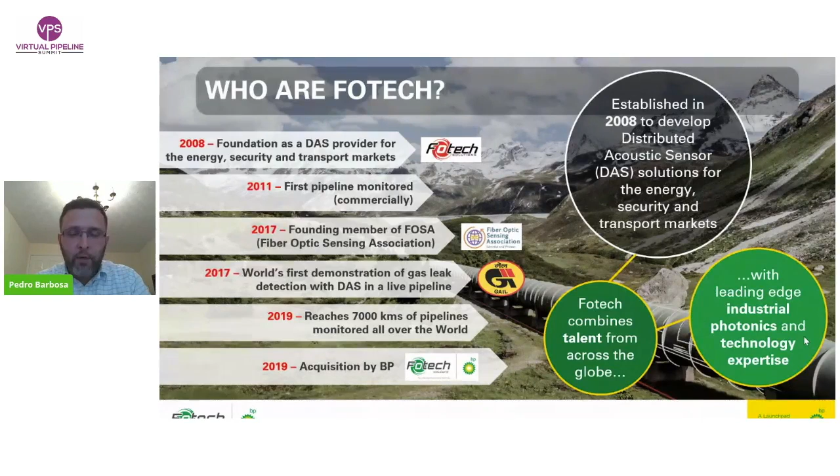So first of all, just a quick word about Fotech. Fotech was founded in 2008. We've also been leading the market in terms of distributed acoustic sensing. Just recently, last year, we were acquired by BP, so we are a launchpad company by BP. We've been monitoring in multiple sectors. Specifically today, the talk is about pipelines, but we also work in smart cities, infrastructures, and security.

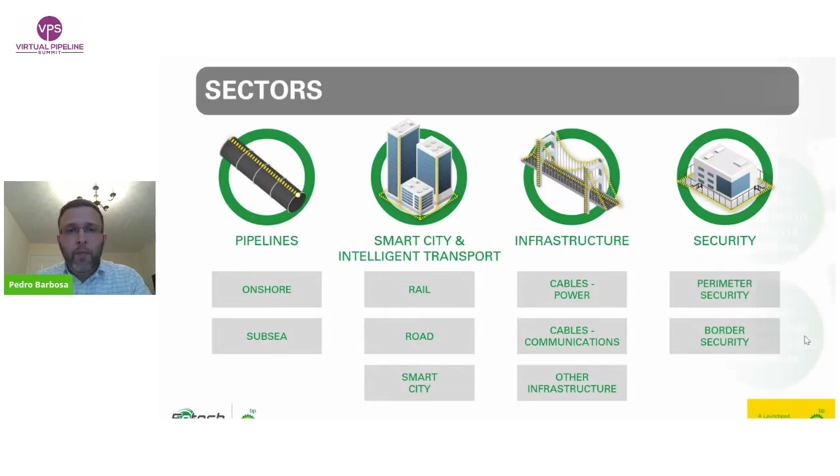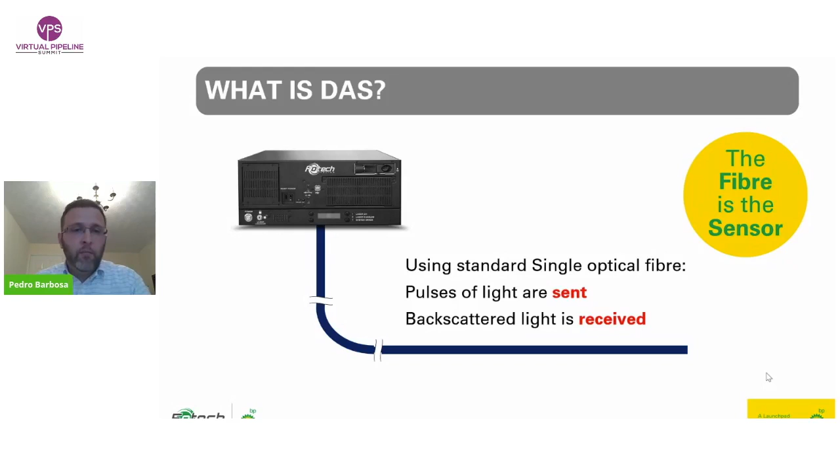So what is DAS? It was already discussed a few times today. We basically use fiber optic as a sensor. Our system sends pulses of light, and there will be a backscatter that is received. When there is an interference, any changes in the signal will be monitored and analyzed by the system. We have complex algorithms based on artificial intelligence and machine learning that can not just detect, but then identify what is causing the disturbance.

What are the core challenges that this system can tackle? Criminal activities, so illegal hot tapping, third-party interferences, leak detection, but also pig tracking, also mentioned today, and geohazard detection. The technology is fairly new compared with other technologies used in the industry, and it's progressing. There is a lot of research and development, so I truly believe that this list will increase over time with other capabilities. So it's a single system.

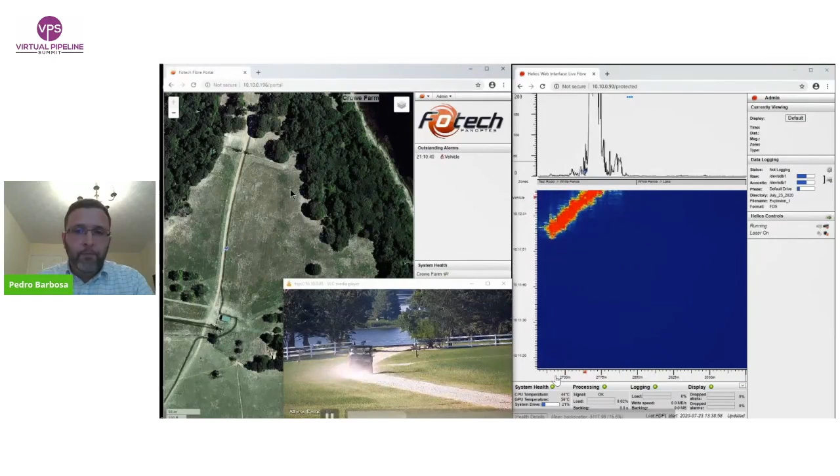And before I go into the topic per se, let me show you a quick video of a demonstration. This was performed in one of our facilities in the US, where on the left-hand side you have the map that is visualized in the control room, and on the right-hand side you have the signals coming from the fiber. We have a graph of distance versus time, where you can see the disturbance that the vehicle is producing and the buried fiber is catching. And you can see that alarms are raised within seconds and they are pinpointed on the map in real time.

So a system with multiple capabilities. In this case, you have vehicle detection and alarming. You have a person walking, and as you can see, after 2 or 3 seconds, a walking alarm. You can see how the signal is also different. We use a set of characteristics: the intensity of the signal, the frequency, the location, if it's moving or not, if it's persistent.

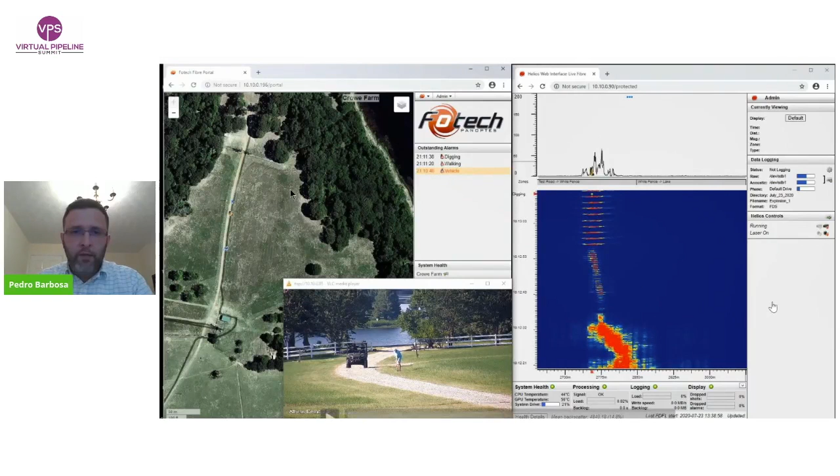So it starts digging, and again, after a few seconds, you can see a digging alarm coming up, with the exact location. We're talking about a couple of meters. Our resolution is less than 1 meter, but depending on the characteristics of the installation, let's say a couple of meters in terms of accuracy.

So any system will be composed of hardware and software. But something that is also important, if not even more important, is calibration. This is not an off-the-shelf type of system. This is not something that you buy and install by yourself, like a printer or any other IT that we have at home. It will require some calibration, some tuning, precisely to avoid some of the issues already mentioned earlier today, which are false positives and false alarms. So let's take a look one by one.

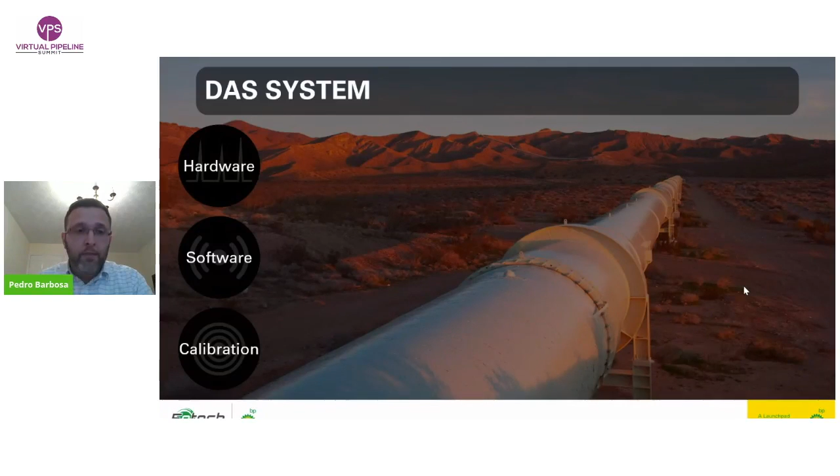So the car, the person, and the digging. So this is what the different hardwares will be able to do. However, when you pass into real life, the software will play a very important role to differentiate different signals that are happening in the same location, classify it, and identify what is what.

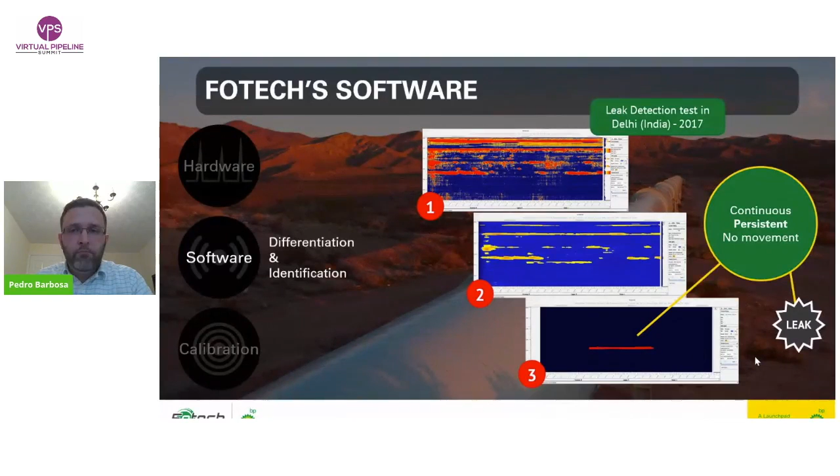So if you go a bit deeper in this example, what the software does is it filters the noise in steps. It will analyze the characteristics of the signal. So in this case, it's continuous. It persists in time. It's not moving spatially. It has certain frequency, certain intensity, and the system will classify it as a leak. So all this process happens in real time. Alarms are raised within a few seconds or a couple of minutes, depending on how confident basically we want to be. And when you want to react, being very confident is important.

But to be confident, we have to have a very reliable system. System performance is affected by multiple characteristics. It will be affected by the fiber optic itself, the position of the fiber optic, the soil type. Is it sand? Is it clay? What is the water content? So many aspects will affect the reliability and the performance, but not just the exterior effects.

The system itself, I like to see it as a triangle. It's really playing a bit with the resolution, which in our case is less than a meter, the range, again, up to 100 kilometers, and the sensitivity of the system that will allow the detection of different systems with different intensities, call it like this. You may need a very sensitive system for something that is less energetic, while you don't require much sensitivity for something that has more energy behind.

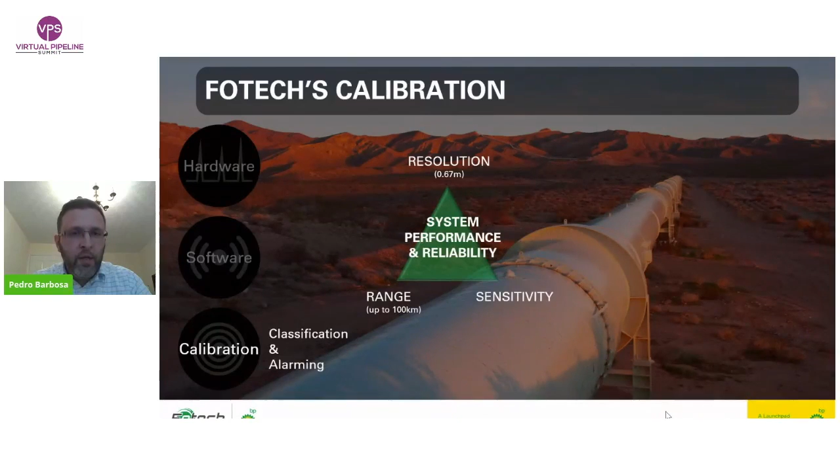However, if you want to increase sensitivity or resolution, for example, you will compromise range and you will compromise sensitivity. So you cannot have the best of the world in one system. You really need to tune it and to calibrate it for what is required.

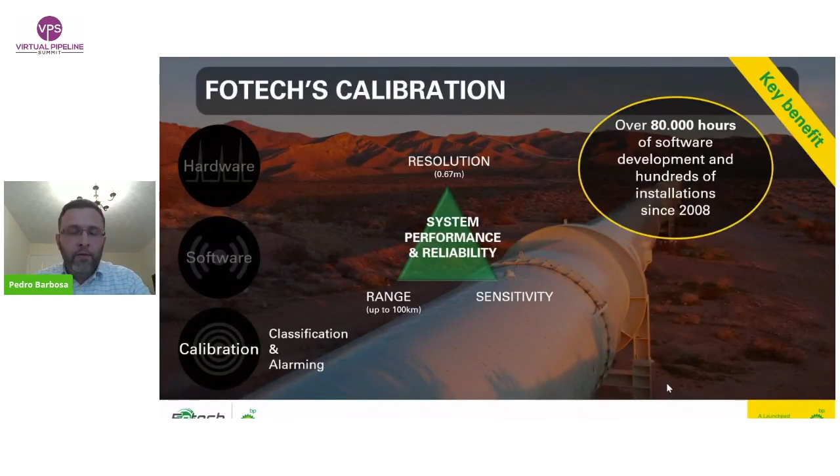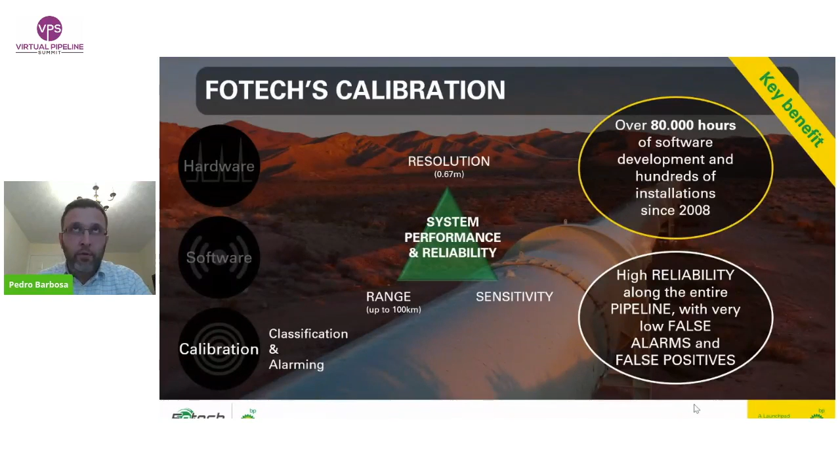And this is really where, at Fotech, we are quite proud to have that experience. It's actually one of our key benefits. We have over 80,000 hours of software development, and we have hundreds of installations all over the world. And that really gives us that reliability that allows us to have a very low false alarm and false positives. Again, this is for real installations where you have noise behind and not a test or laboratory environment.

Why is this so important? And a bit about the topic now of the presentation. Because if you want to react fast, you want to react to the alarms that really matter. So the way we alarm, we will have a three-stage alarm, from green to yellow and then to red. This is set in advance, again, during calibration, and with the operator, we'll try to understand what are the main problems and what are the threats that actually require immediate response.

So typically this will be illegal hot taps, third-party interference, not so much if it's a car, even though a presence of a vehicle in a non-authorized area can also be an alarm. So this has to be defined in advance for the entire pipeline.

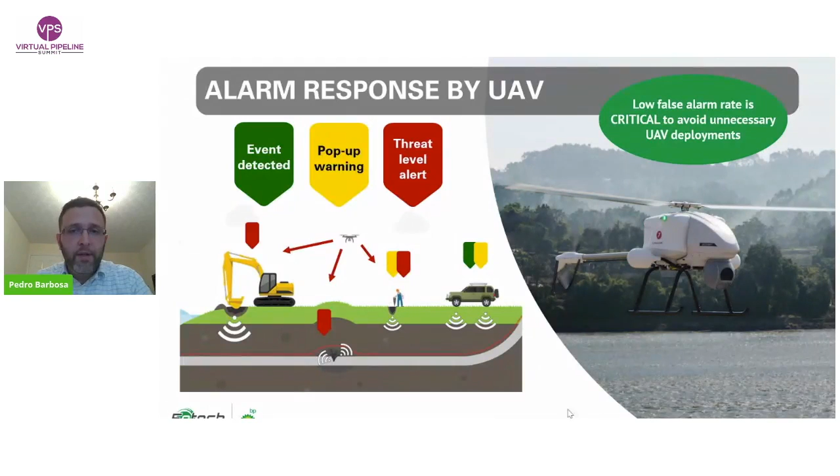What we want to avoid is really to have, in this case, an automatic response of a drone being deployed unnecessarily. I've heard today someone saying potentially thousands of events in a day. I would say easily thousands of events in a day. And you want to make sure that you don't have the drone back and forth all the time. You want it deployed when it is necessary.

So the specification of the drone is also very important. If you want to have a system that actually is fully integrated, the selection of the drone is critical. We don't offer the drone service, so we have partners and companies that work with us for that. The advice is pretty much the same. They advise a helicopter type of drone, which is able to have a vertical takeoff and landing.

That's quite important if you have a few drones deployed and they are deployed automatically. You want also to protect them when they are on standby. And also when they are hovering over a certain location, it's important to have stability.

Drones nowadays also use artificial intelligence. You can actually have drones with sensors that are able to recognize faces, recognize people, and follow vehicles and persons if they try to escape. And you have actually a very powerful deterrent to criminals, for example. The speed is also very important.

There are, I would say, a few considerations regarding speed and weather conditions, for example, among others. I will touch a bit on that in one of the examples, but also range and autonomy for appropriate response. So with a drone that is automatically deployed after fiber optic sensing detects an event, you can actually reach a remote location quite fast.

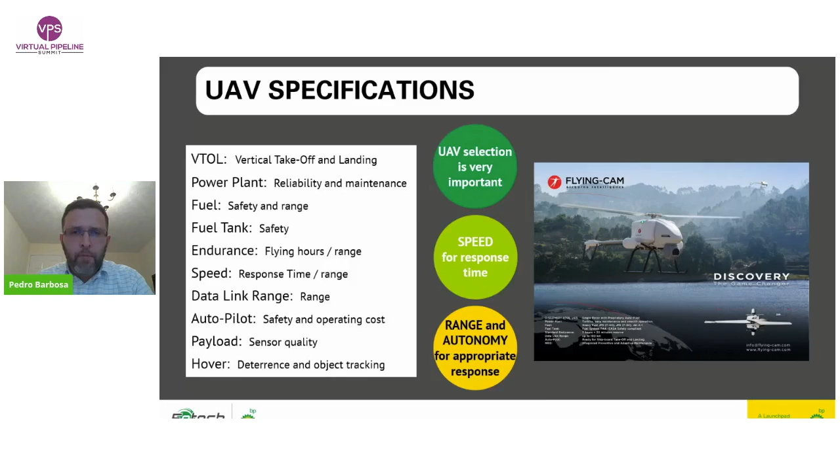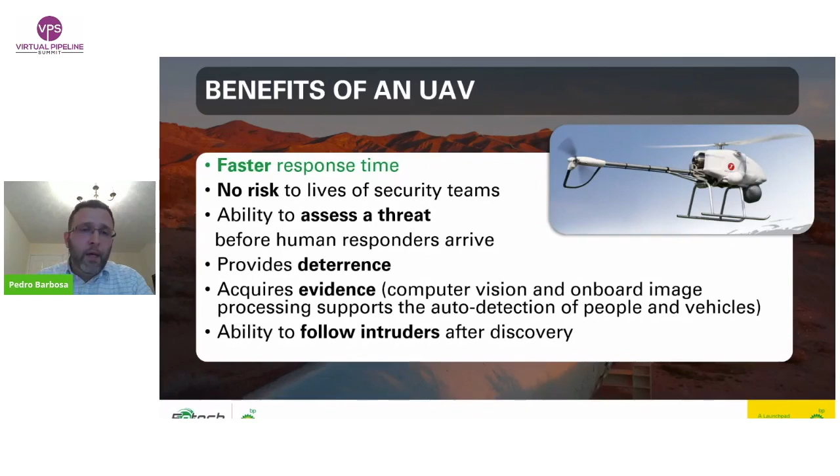So there are many advantages. Faster response time, less risk or even virtually no risk to the lives of security teams. They can be deployed afterwards, after the situation has been assessed. The ability to assess a threat before humans arrive provides deterrence as well, but also acquires evidence. And in case of criminal activity, acquiring evidence is actually also quite important. Also, the ability to follow, as I've mentioned, is something a drone can do.

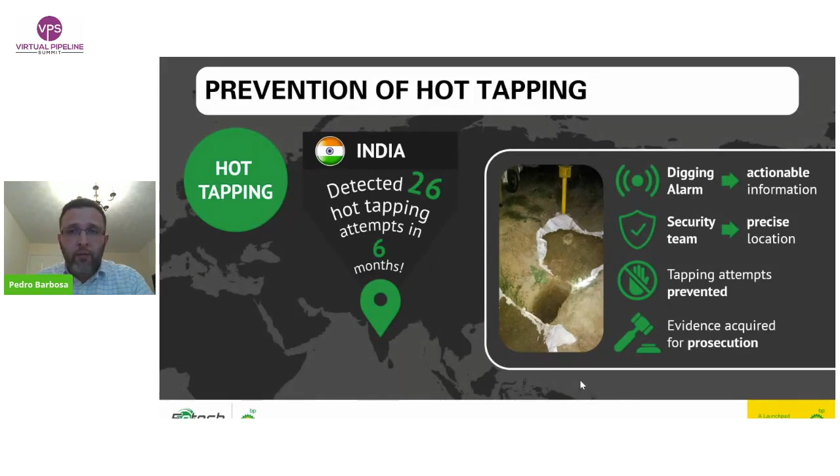So what are the examples of an integrated solution? The first example I have here is an illegal hot tap. This is from an installation we did in India in the past. We detected in this case 26 hot tap attempts in 6 months. If you have confidence in your information, if it's reliable, the drone could have been deployed. In this case there was no drone, but by understanding what is required for response time, you can actually even prevent some

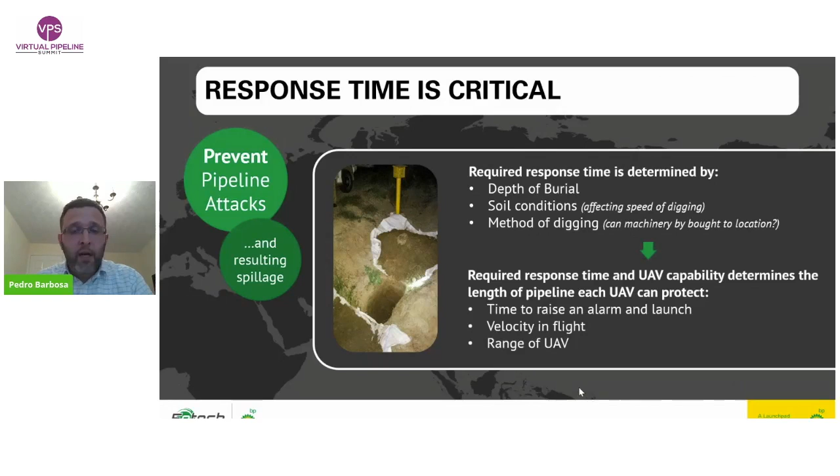interferences from happening. For example, in terms of distributed acoustic sensing, we can assess the depth of burial, the soil conditions, and the method of digging to estimate how long it will take for someone digging to reach the pipeline. In terms of the UAV or drone, the time to raise an alarm and launch is important, but also the velocity and the range. All these parameters worked out in advance can take you from detection, classification, and alarming to potentially prevention with a fast response, which ultimately is what most operators are looking for with third-party interference: to prevent

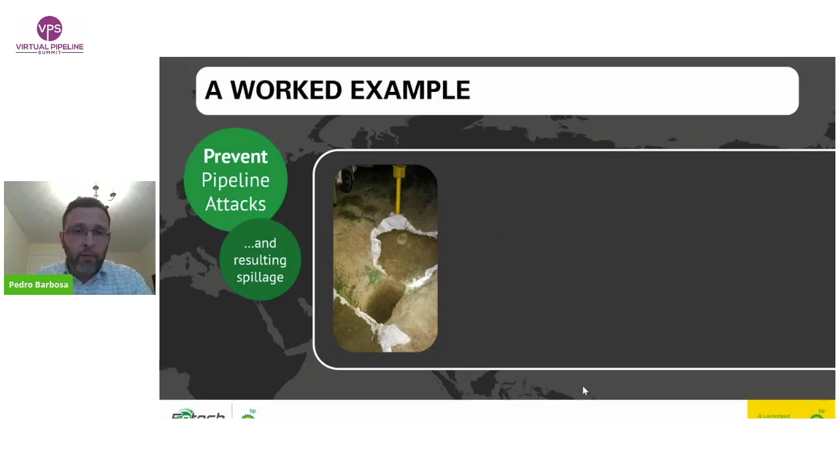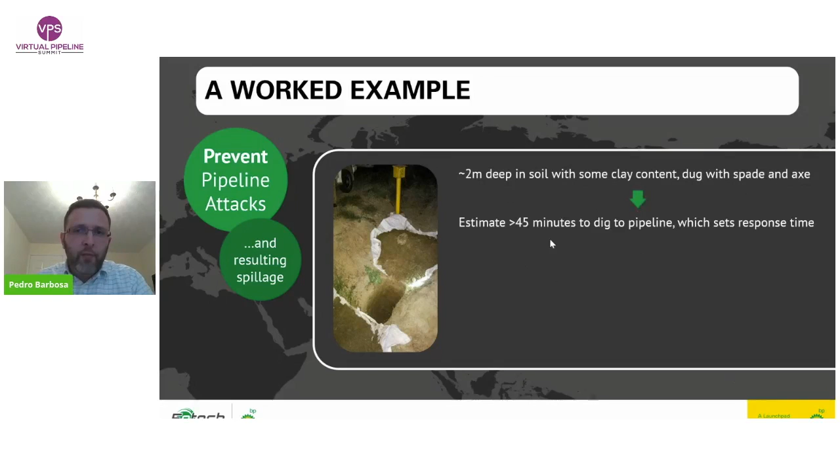the incident. So here is a very simple example. Let's suppose the pipeline is 2 meters deep, with some clay content, and they are digging with a spade and axe. We can easily estimate it may take more than 45 minutes to dig up to the pipeline. With a UAV, let's say 5 minutes until it's in the air after the DAS is able to detect, alarm, and have good confidence it's not a false alarm, and the UAV deployed at, let's say, 90 kilometers per hour, we can estimate around 40 minutes of flying to reach up to 120, let's say 100 kilometers if you consider flying against the wind.

So this is just an example. It is not real, but you can easily work out how many drones you need, the type of drone you need, and if you are confident in your DAS provider and in the reliability of the system, you're also confident you are not chasing a false alarm.

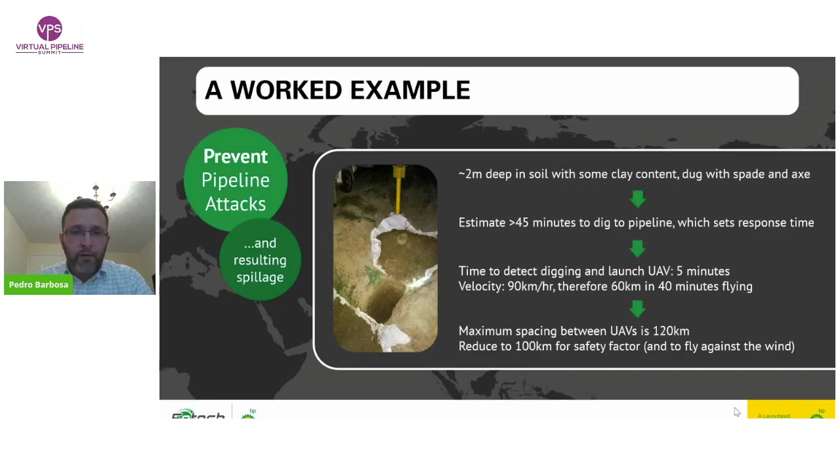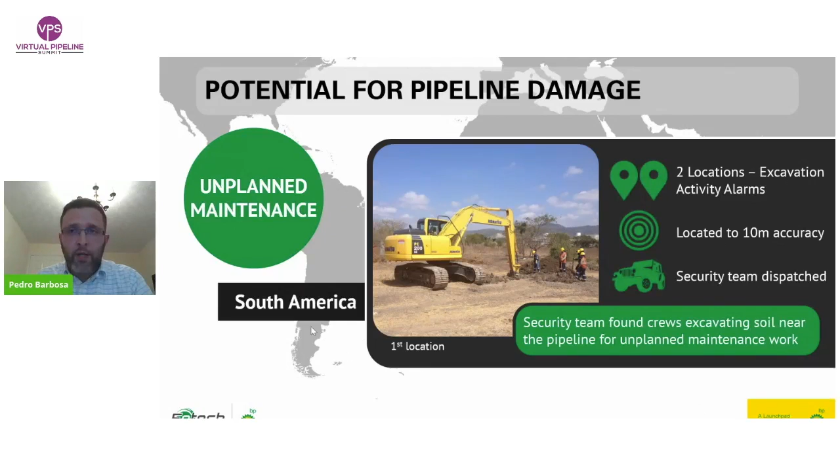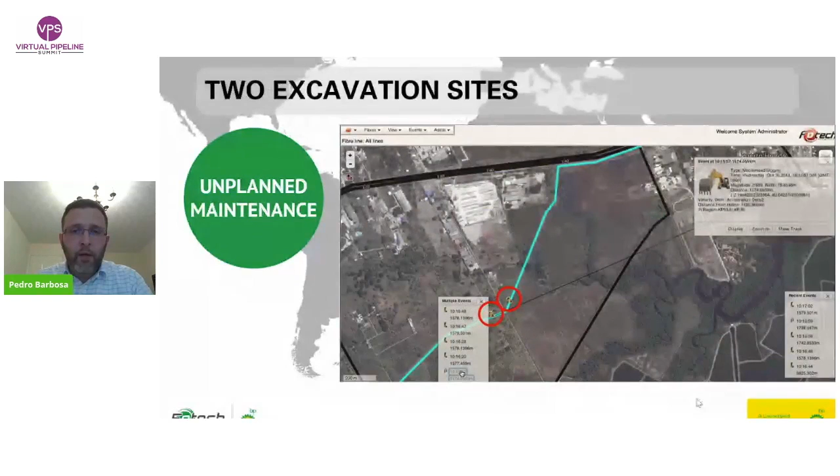Another example is unplanned maintenance, a third-party interference that is not criminal. This is from South America, also an example we had. Multiple locations: there were actually 2 mechanical diggings happening at the same time, 200 meters apart. The crew did not damage the pipeline, so this was a true third party, but it could have damaged the pipeline. As was already mentioned today, mechanical damage is actually the most common cause of pipeline incidents and leakages, both in the US and in Europe.

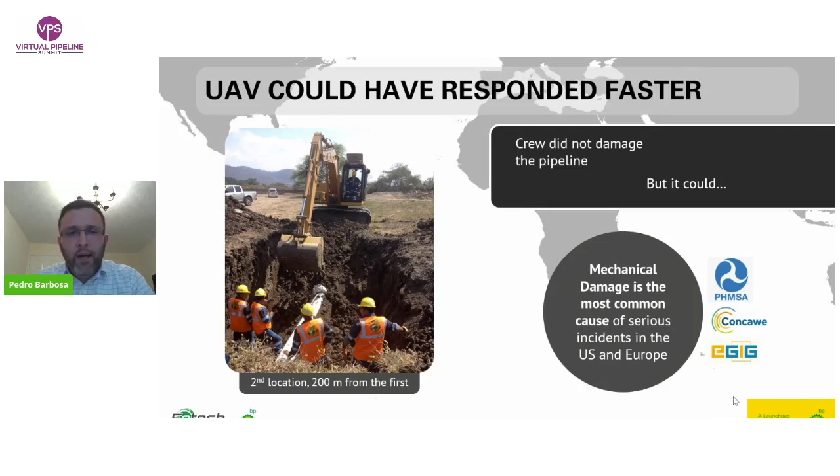I'm not going deeply through what CONCAWE, PHMSA, EGIG and other entities provide in terms of statistics and data. We've seen that already today, but it is clearly the number one, and for the future as well, one of the main reasons for pipeline incidents. But again, I want to pass the message that this is just another barrier. If you look into risk assessment and improving pipeline protection, I don't want to pass the message that DAS is the only solution.

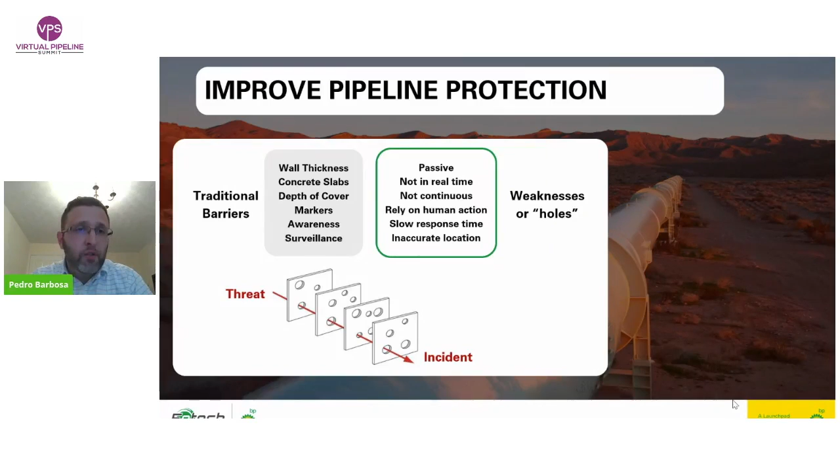Traditional barriers come from increasing wall thickness or the depth of cover. We talked about surveillance and awareness methods. The panel discussion was very interesting, talking about people, politics, culture. There are so many things that are very important, but most of them are actually passive. They are not continuous, not in real time, and many times very slow to respond. So there are weaknesses. Every system has weaknesses.

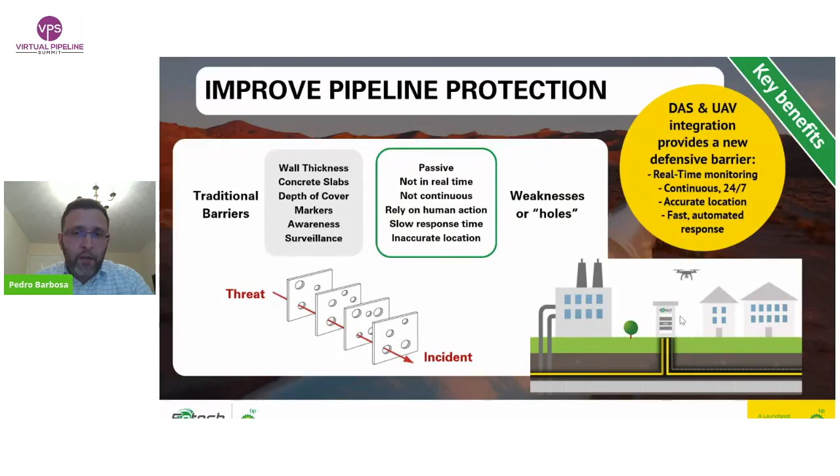What DAS and UAV integration provides is really a new barrier, a new technological defense that is real time. It's continuous monitoring 24/7. It provides a very accurate location, as I've mentioned, a couple of meters. And it's fast, and with drones, it will be an automated response. Drones can typically be, for example, on the roof of a station and deployed automatically, so they will be a very good solution.

So, in summary, we'll have sensing, we have detectability, classification, we have very low false alarms that are achieved by a very accurate calibration, good tuning, which comes from a lot of experience of many DAS providers, and then a very rapid response from UAVs in this case.

I understand that many countries will have some limitations in terms of legislation and regulations, but I truly believe that for security reasons, for the future, many countries will move in this direction of allowing drones to be automatically deployed. And at the end of the day, that will be good for the operators. It will protect the environment with less spillages, and will save money at the end as well.

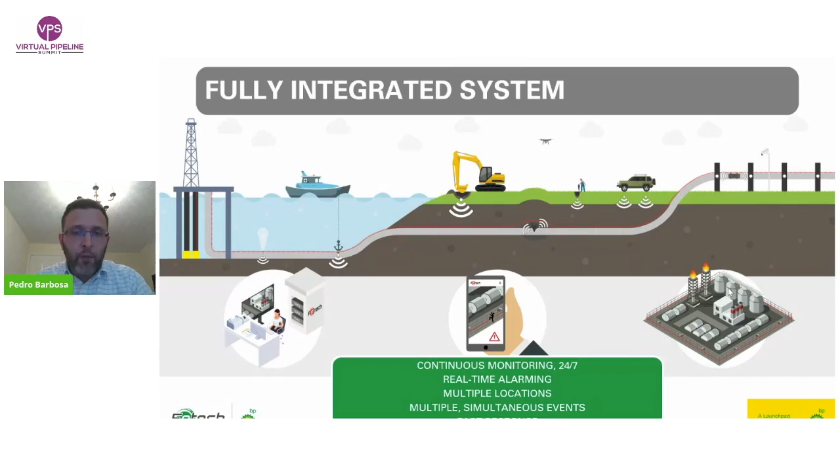So a fully integrated system. It's a system that will have DAS for monitoring multiple events, both onshore and offshore, doing pig tracking, and can be integrated with CCTV systems, with drones. You can send alarms to different people by text message, and it is basically allowing a fast response after having a real-time understanding of the threat.